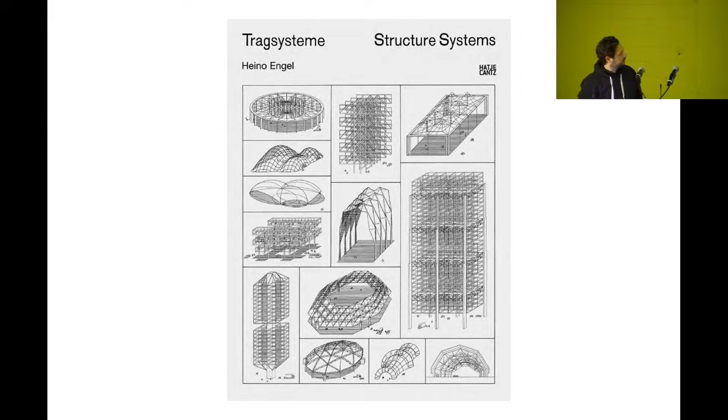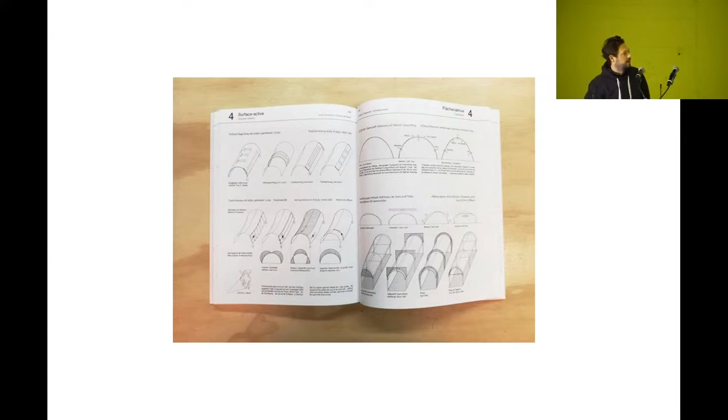So I won't show any of this, but we didn't look at this book that much last year, so this is from last year. And I find it interesting that this is the book that I see on most people's desk now related to thinking about structure. When I was studying, I think there were 2 or 3 other books that were on most people's desks when they thought about structure. And I will say this, as an educator, I think it's as important for you all to know the engineers working in your time as much as the architects working in your time, and the relationship between those two.

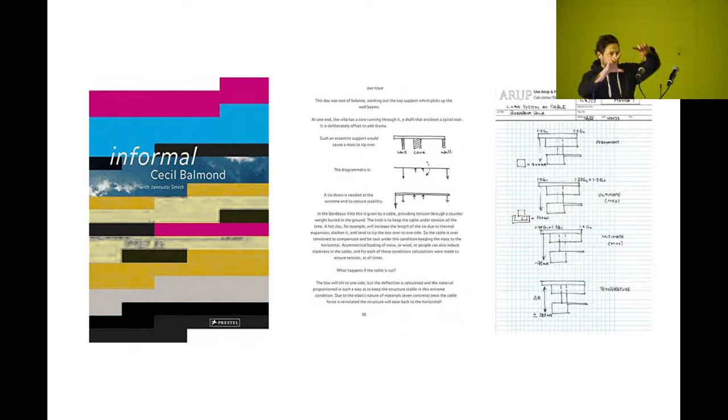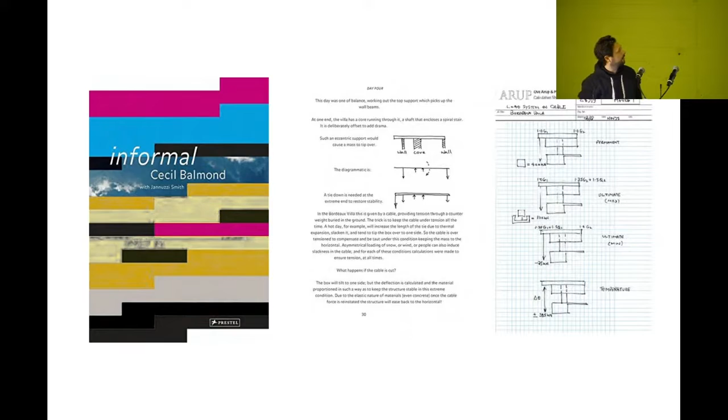And so Cecil Balmond was an engineer who also worked as an architect. If you don't know him, it's a great book. It's a quick, easy read. It's like this big, right? And lots of small passages. He was someone who I think had an idea about elegance, but expanded it to, let's say, increase the options, both aesthetic, formal, etc., within elegant systems.

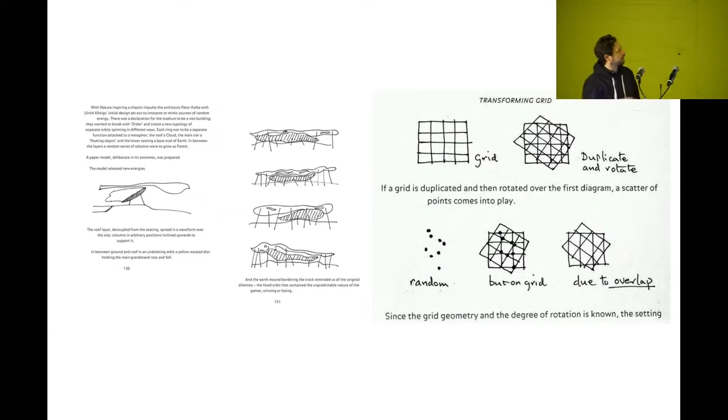So in his work, you find a lot of ideas of redundancy and pattern, and you overlay, for example, these grids on the right, and you'll see the Ito project that worked this out, unless it might be the next slide. Yeah. So he had these ideas of, if you just have an excess of structure, that means I can clip 50%. If I have 200% structure, then I can start to clip randomly. I can take this out, I can take that out, and I'm left with things like this on the right that sort of randomly, I mean, random and not so random, but the redundancy is what allows that to happen with a certain amount of ease and flexibility on the designer side. So much different than the Engel approach, where you would have a regular pattern embedded in the structures.

And I think the other book that was on a lot of desks when I was a student was Guy Nordenson's book with Catherine Seavitt. I studied with Guy Nordenson, and he might object to this, but I think he is someone both interested in elegance and a sort of sloppiness to structure. Of course, he would object to sloppiness, but there's a lot of eccentricity, things that operate outside the system, but not in a planned way like you find with the Cecil Balmond work.

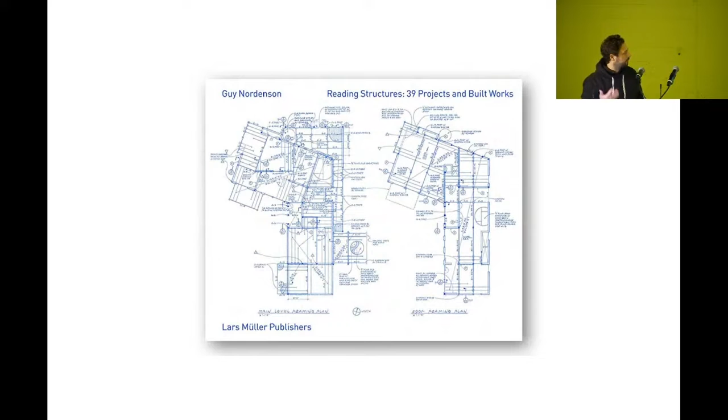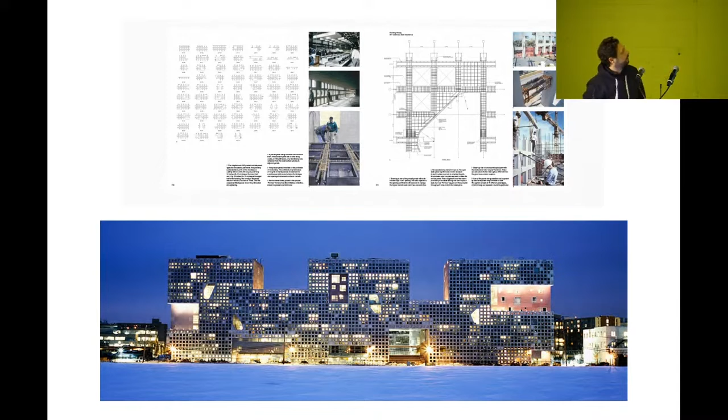So he tends to work with a lot of architects that might be in the fine art, the arts sphere, works very closely with Steven Holl. This was the Simmons Hall at MIT, which was a Guy Nordenson project. So both systemized and highly eccentric, but less redundancy, right? So there's not an overloading of the system. I think that's the rebar pattern. So where things get weak, you double up in a more local area, but he sort of embraces those changes to the system. He also worked on the New Museum, and this is another Steven Holl building he did.

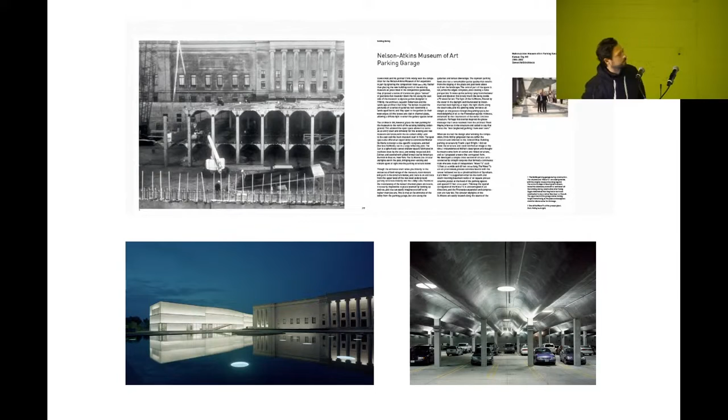I think most interestingly with Walter De Maria, worked on the sort of the parking garage, and I think that'll bridge into this idea of genetic and generic. So the studio we were part of last year was really set up around these, so I hope this isn't too remedial and that it's repeating a studio from the past, but I think it could be interesting to see the lineage of that. We had 6 types, and

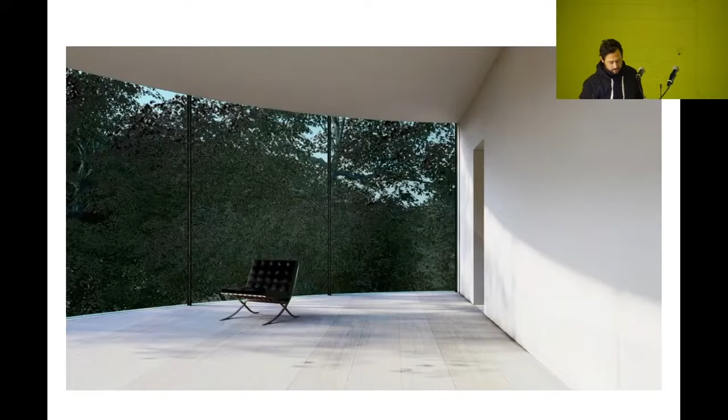How'd that happen? Wait, what happened? I want to go to the top without you seeing everything. Okay. Thank you. How do I go full screen? This one? Is that it? What is it? Control L. I know, I'm not a Mac user.

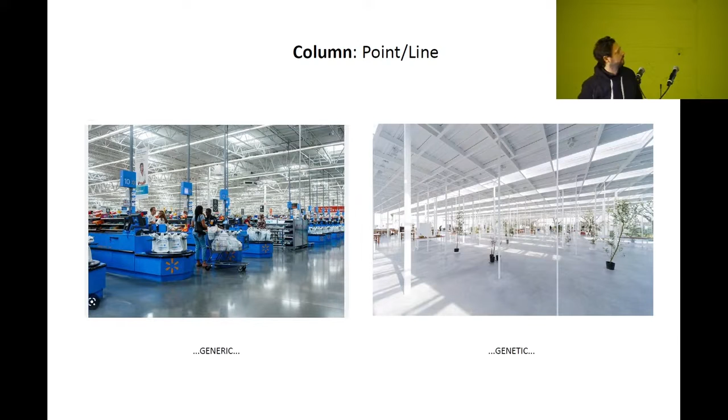There we go. Okay. So I find this kind of interesting, like the most rarefied and the least rarefied buildings using more or less the exact same structure. But I think you can trace this into all types. This is another Steven Holl building, a project for a Cinematheque in Korea. Surface, slab, edge, line, very cleverly using heavy materials in light ways. So when you turn the slab 90 degrees, you get these thin lines, but it's not much different than a generic, I don't know, Amazon warehouse construction.

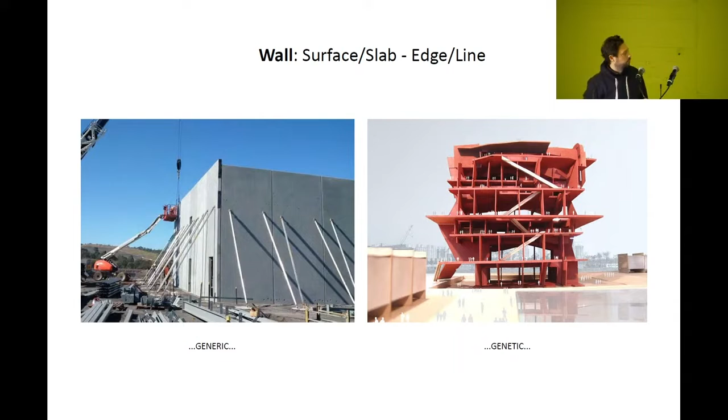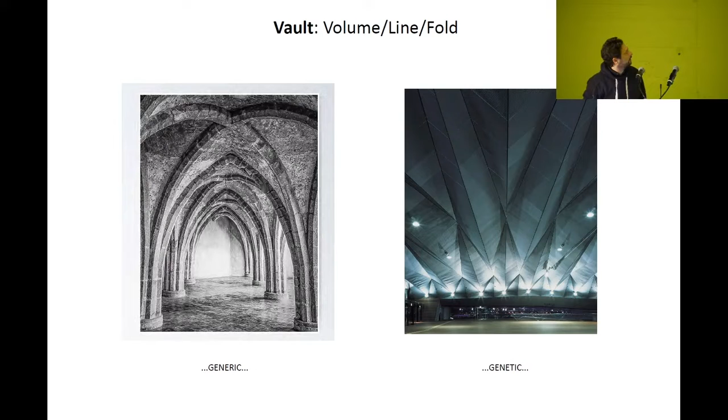So a lot of, I think, great engineers are able to take these really simple systems and push them into new territory. Surface and volume with arches, voids and infills, vaults, lines, folds, volumes. That's Alejandro Zaera-Polo's Yokohama Port Terminal on the right, and then a sort of generic Renaissance arcade. The Louvre pyramid on the right, a sort of adaptation of a generic space frame building. I probably should have looked for an older space frame because that looks like it's of a newer vintage than the pyramid, but I think you get the point.

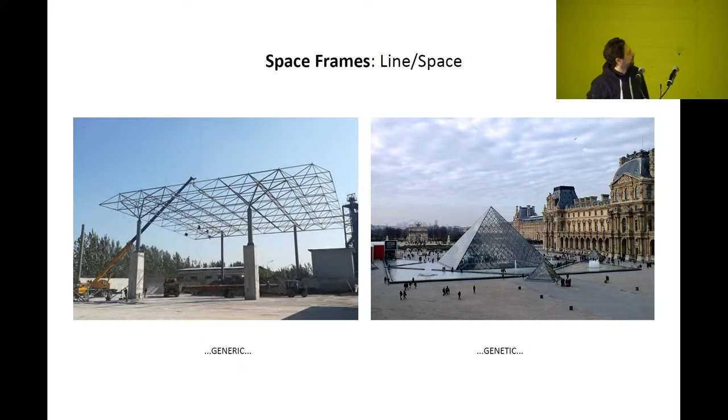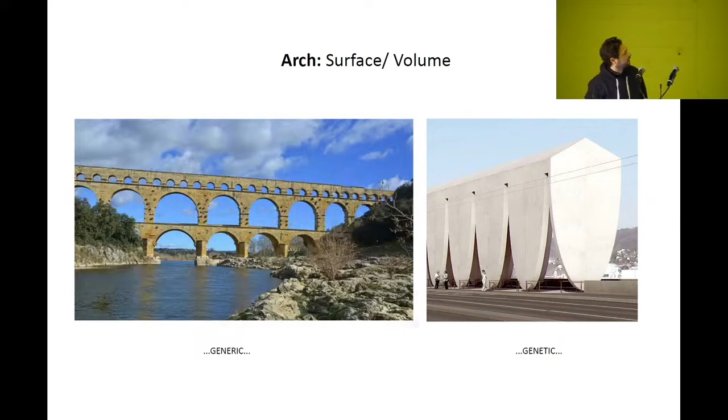And then the last one, which I think is an inversion of all the other types, in that in these, the generic is kind of, I don't know if the word improved is fair, but the generic is explored through the more rarefied architect-authored building. But I think funny enough, in the long span, it actually happened the opposite way. So the cathedral or Nervi, those were the rarefied that have been turned back into the generic by cheaper types of construction. So I think it can go both ways, right? So that was the setup.

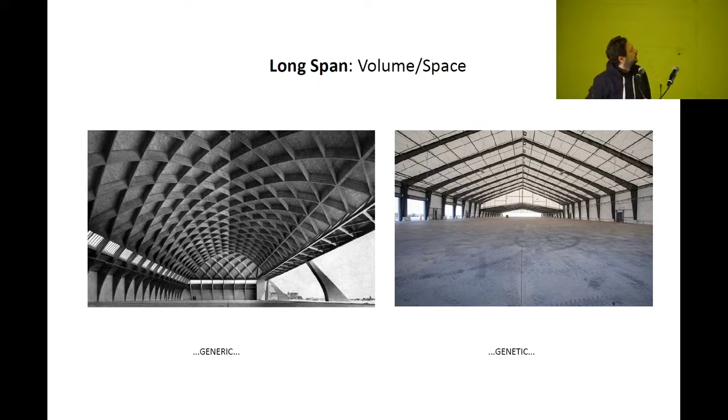So this was the first project I did with my partner Julian Rose, and we were obsessed with structure. I think we still are obsessed with structure, but we were obsessed with basically how do we undo structure, right? And we wanted to think about reinventing an idea of elegance that was not minimal, but on the complete opposite end of the spectrum. So our rough theory was, yes, you could move towards the absolute minimal, most refined element, or on the other hand, you have a really simple idea of structure, which is enough of anything holds something up, right? That you don't even actually have to think about structure. You take a pile of chairs, you take a pile of whatever, enough of anything holds something up.

And so we started these simple experiments. We were also very interested in landscape and some other ideas of structure. I think the other major thesis that we had around the idea of minimal structure was that it did not have to be vertical. Most structure is kind of minimal and vertical. We were obsessed with this idea that you could have a type of structure that expressed itself equally in the vertical and the horizontal dimension.

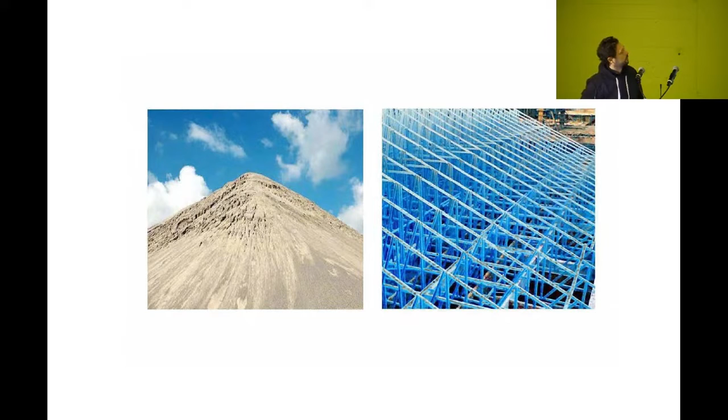I can show a little preview. So that's a prefab aluminum truss roof that you might put under a gable roof to keep it from blowing away. And we wanted to work with these two generics that were kind of local to that area. One was sand piles, and the other were these sort of off-the-shelf kits that were being deployed everywhere. And we sort of just love that a truss and a pile have the exact same property, right? And they have the same section and the sort of same geometry.

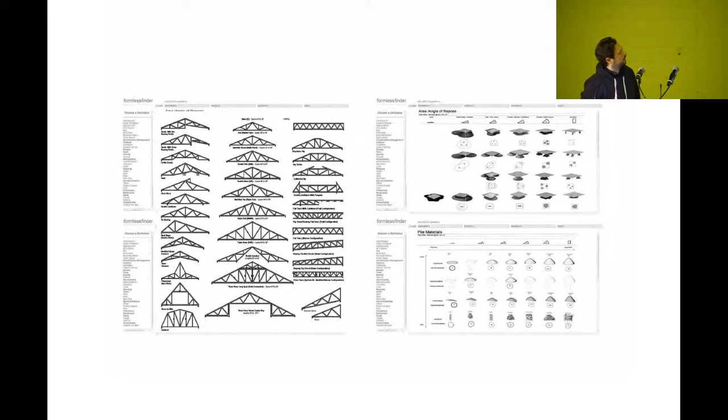So we started playing around with some of these, like the way you have truss diagrams. Could we produce pile diagrams as a real structural device? A mud pile, well, it's actually a puddle. Mud puddle on the left can't hold up a slab, and then if you get too far to the upper right, you get back to a conventional column. So we wanted to work with an architecture that was sort of stuck somewhere in between.

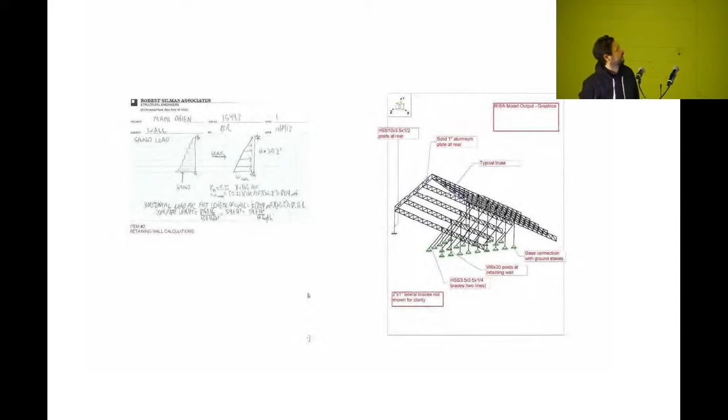And we worked with Robert Silman Associates. The only reason this project got through was because Robert Silman Associates had helped re-engineer the sagging cantilever for Fallingwater. So when the city of Miami kind of questioned our engineering chops, we had very good backup. And I think when you're trying to do new things in structure and engineering, it's like showing up with your lawyer. You bring an engineer, and that really helps.

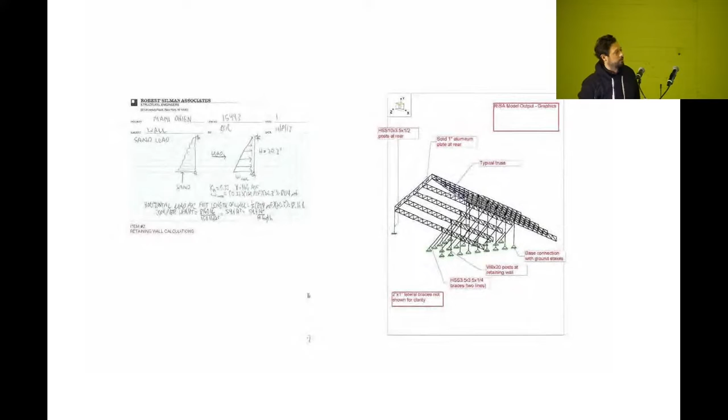So as kind of loose and messy as the things we were playing with were, they were also super engineered, right? So like table after table after table, each connection at the truss. This is more like what the project is. So it doesn't really address structure.

Except for one fact. So the other thing we wanted to do here is, we were going to work with a certain amount of excess, but in Miami, unlike New York, where you have bedrock, things are drilled into the bedrock. In Miami, everything sits on shifting sand. So whether you're building a Walmart parking lot or a 50-story tower, you have to put in a sort of counterweight of concrete to hold up your structure.

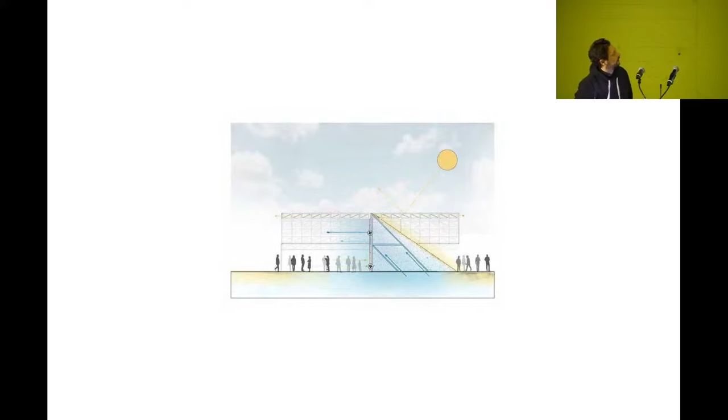And what we thought of was, could you build a building without a foundation? So we wanted to create a sort of pavilion that had no foundation. So nothing goes in the ground. And instead of building a footing, we use a pile of sand to weigh the whole thing down. So embedded in that pile of sand was a really simple set of steel struts, which actually hold the entire cantilever down. It's 40 feet in either direction. And that became the structure. It's a typical detail. And sort of what we ended up with.

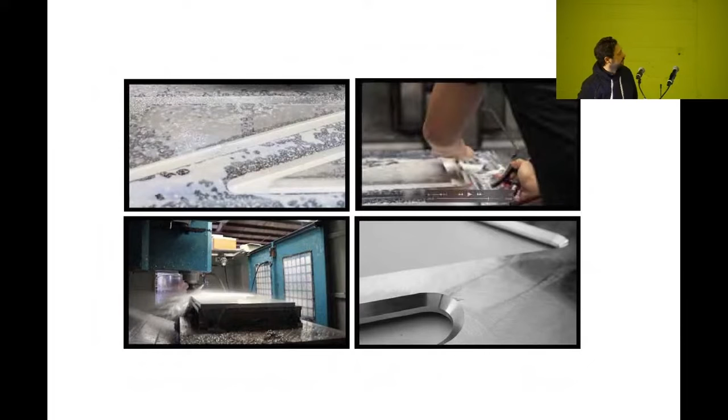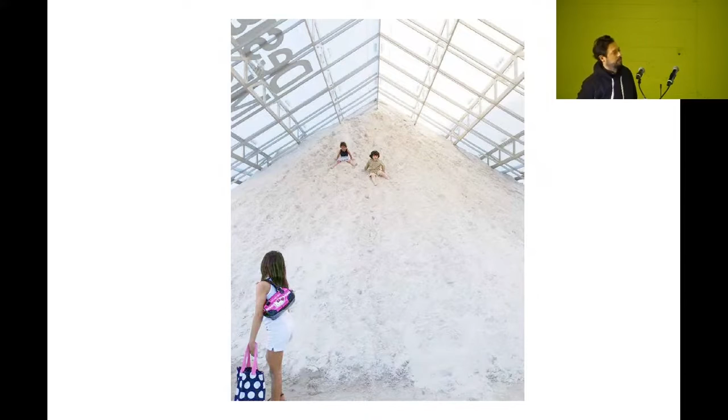So it was a combination of super high precision and complete informality of the sand pile. Just some shots. And I think what was really exciting for us was, if you reinvent structure, you also reinvent use of buildings. And so we had people, families, building sand castles, acting as if it were a sand dune, et cetera. And it kind of opened up the types of use for a building also, which we were kind of excited about. There's the night shot.

And so after that, not many people asked us to build other buildings out of sand. And so in terms of career trajectory, I knew to build bigger things, I needed to get at it a different way. And so with James Carpenter, we won the competition to redesign the Gateway Arch Museum, which is a building under the famous St.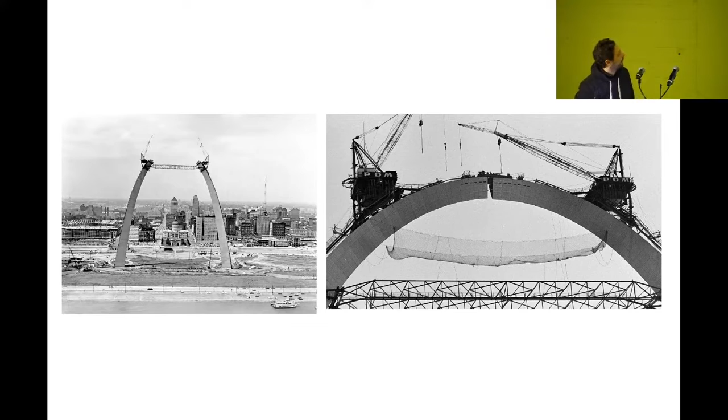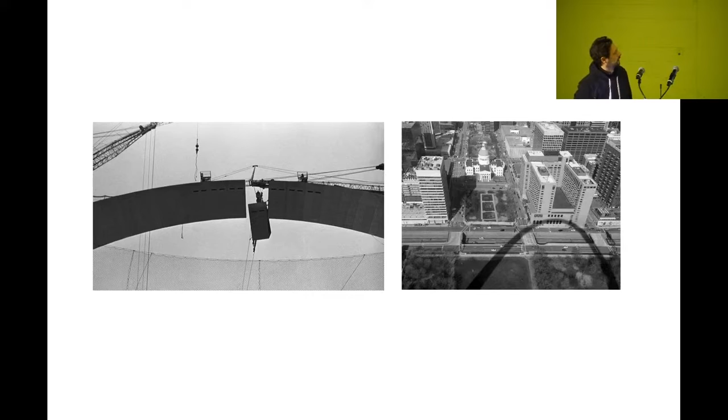Louis Arch. When Saarinen designed it, there was a park that was supposed to connect the State House, which you see between the legs of the arch, and the arch grounds. That was never achieved. There's actually, if you don't know it, a great movie, maybe '65 or '66, about the building of the arch. I think maybe it won or was nominated for an Academy Award, but it is a really entertaining documentary about structure.

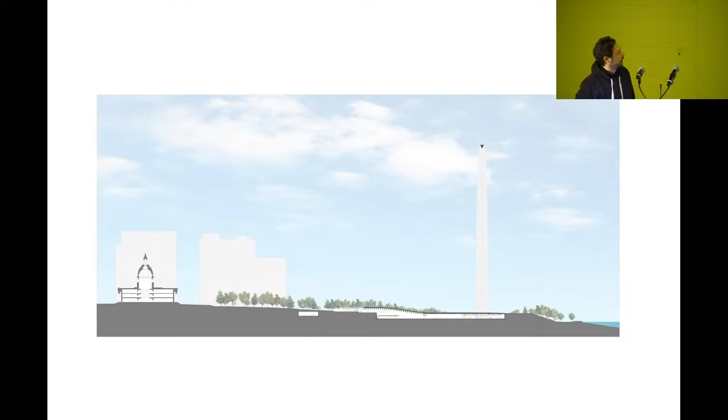And so this was our proposal, was to basically do what Saarinen wanted to do, which was connect the city hall and the arch, and then build a building that would also allow you to connect those spaces, but to do it in the most invisible way possible. So we put 45,000 square feet underground on the historic lawn, and a kind of land bridge over the highway that connects you back to the city hall.

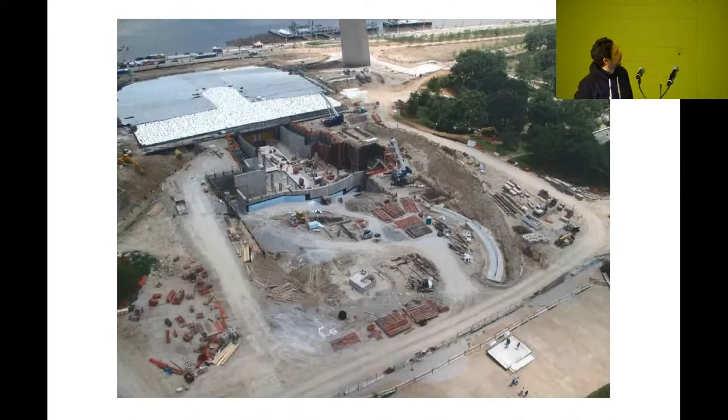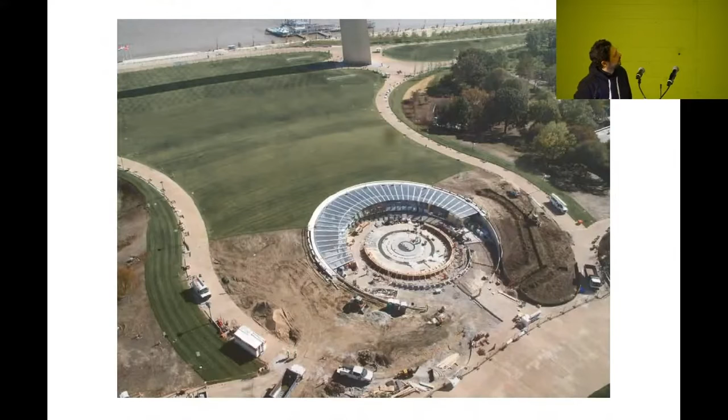And so this is just a construction sequence of building this, all concrete underground. And then that's the entryway shaping up. That was mostly my responsibility. And so the entryway is all steel and glass. It's coming together, view from the top. And views back to the courthouse. The section was kind of interesting because you could get light maybe 400 feet back underground, and it was pretty excellent to be way back in that space and get sunlight back there.

So maybe a little tiny sub-history of this office's work. James Carpenter is a really interesting architect, but also artist who started working in glass a long time ago, worked at Dale Chihuly's studio, and had less interest in art glass, but started to develop different types of technical glass and worked as an artist in residence for Corning and helped develop some of the earliest glass technologies that are now in your phone or found in Gorilla Glass. It sort of sat around in sheet rolls for a long time before they figured out what to do with it. But the office has a history of really working at the micron level with details and glass technology and construction.

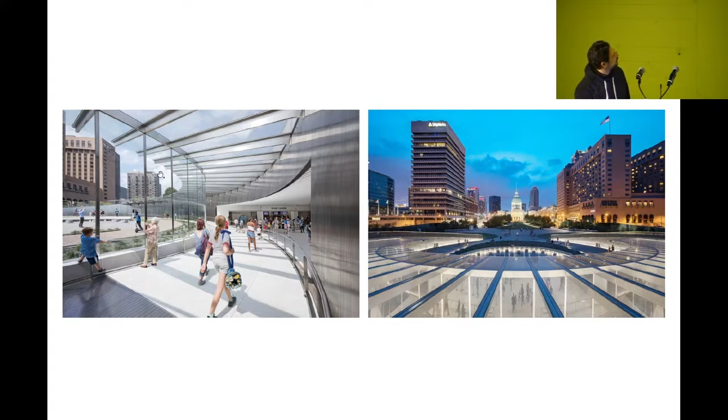Something quite interesting about this image on the left, you see my mouse? Yeah. So this, which appears like really thin structure, maybe propping this up or holding this up, is actually done in the opposite way. These are attached back at a concrete wall here, and these are actually holding this down, right? So we work in some pretty surprising ways to achieve a sort of lightness or thinness in design and construction. I sort of love that moment where you think this is doing one thing, but it's actually doing the opposite. So this is keeping this from actually blowing away and not the other way around. Just some shots from above, and then that's what we're able to achieve with connecting back to the City Hall.

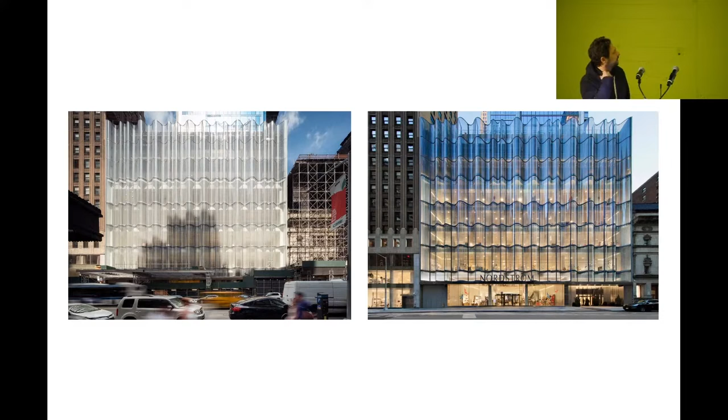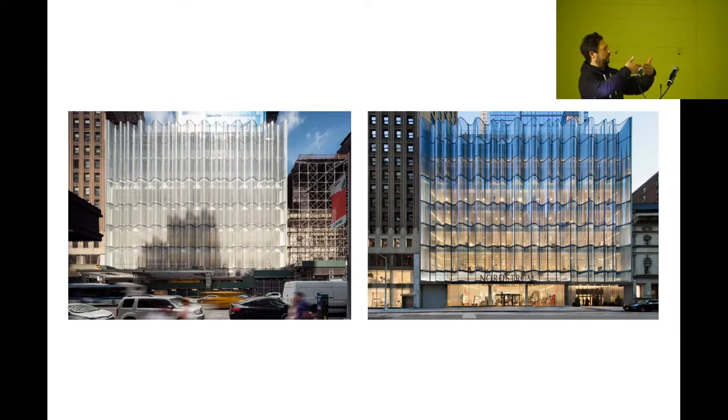Another project that I worked on there was the flagship store for Nordstrom on 57th Street. 57th Street runs all the way across Manhattan. It's a major thoroughfare, and it is dead flat. So every building is maybe, in plan, 1 foot out of plane from the other building, for the whole stretch of the island east to west. And so we had this idea to produce a different view of 57th Street through a bay window.

Other architects had done similar things in terms of forming glass, but we were able to use the glass as a sort of partial column, which allowed you to actually walk out into these spaces. So instead of approaching a flat wall on 57th Street, you can, these are just mock-ups of the process, but now you can step into the avenue and have all of these different urban views through this structure. This is also on what was, for maybe 12 minutes, the tallest tower in New York. I'm sure there's many taller now.

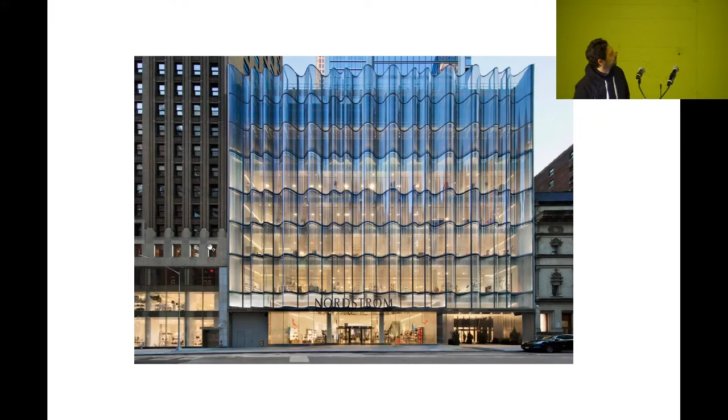Another steel and glass project for the Hudson Yards in New York. I don't know if anyone knows this property, but Manhattan had run out of large sites. This was one of the last sites that developers had their eyes on. It was a large train yard. At one point, there was a proposal to build the Jets Stadium over this and many other things. And this is all sort of pre-High Line. This project now anchors the north end of the High Line.

But it was purchased by a large real estate group that built an entire concrete deck over the train yard. And it's now become a kind of destination neighborhood.

Love it or hate it. You can ask me off camera.

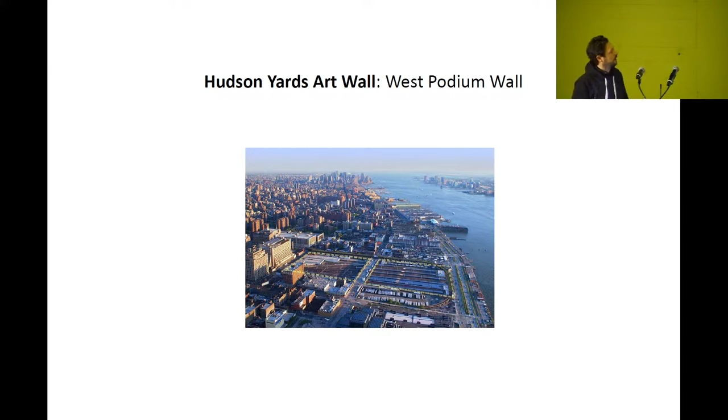But it was certainly a contentious real estate project and became a sort of tower museum for architects. There's a Diller Scofidio tower up and down here. There's Zaha apartments, et cetera, et cetera. This is the yard getting covered. So over here, you're seeing the concrete deck going up on half the yard, and then it eventually covered the

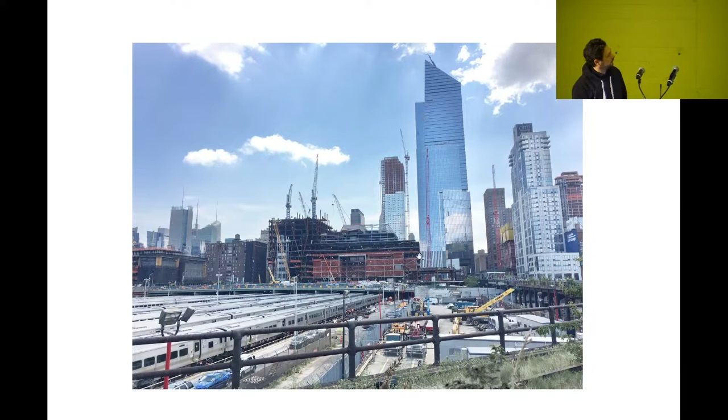full yard. We were contacted because the architect of all of this had, for probably 2 years, a rendering that showed a glass wall the size of the New York City Public Library without any joints in it. And when they got around to designing it, it didn't quite look like that. And they thought that we might be able to help figure that out. So we were called in to design just this retail wall. I think it's roughly the size of 2 football fields.

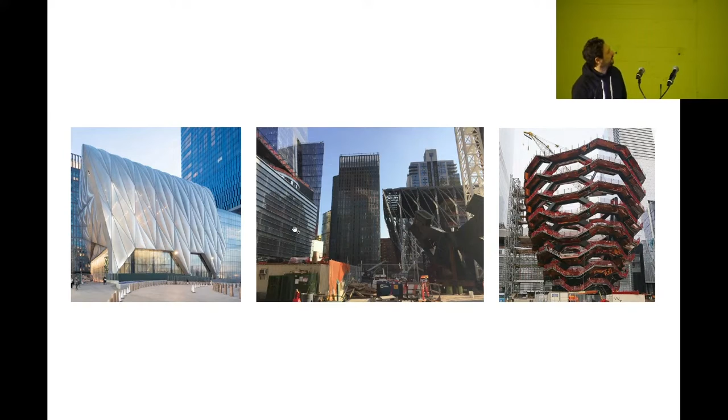That wall, which you see here, and I'll go into in some detail in a second, was between some very loud neighbors, Thomas Heatherwick's Vessel and the Diller Scofidio Culture Shed. And so what we wanted to do was not add to that, but to quietly sit in the background. We had some other ideas in mind. I would say that maybe from the beginning, people had doubts about this thing over here. And as a starting point, we said, the last thing we wanted was 2 of them, right?

Glass is highly reflective. Is there a way to make it a one-off? And Thomas Heatherwick really liked that. There's no duplicate of his project. And we really like that too. So we had this idea to produce a curved cable net wall that was angled so you never got a reflection of the Vessel in it. So it could be its own autonomous glass structure.

This is quite interesting. No one had ever done a curved glass panel cable net wall before. Basically, a cable net wall is all supported by cables behind and struts holding out. So the only joints are silicone. So we have a football-field-size glass wall that has absolutely no frames, and the only joints are silicone. The other tricky thing is, you see it a lot in deli cases, this shape, but this is what's known in the glass world as the hockey stick. And it's incredibly hard to produce, and most people won't do it.

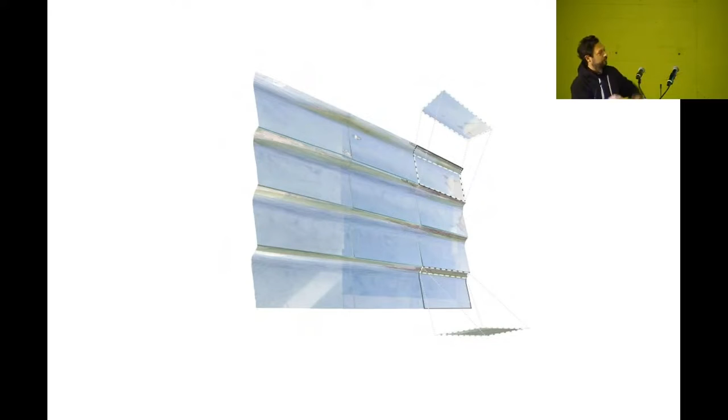We partnered with an Italian company that works on one-off automotive pieces of glass, and they might make the engine shield for the back of a Ferrari, but they hate working with architects. They're always cutting budget. What this company likes to do is make an impossible piece of glass that you only make 10 of, right? And so they don't want to do a tower. It'll get value engineered, and they won't really get to do what they're good at. And the quantity isn't quite right.

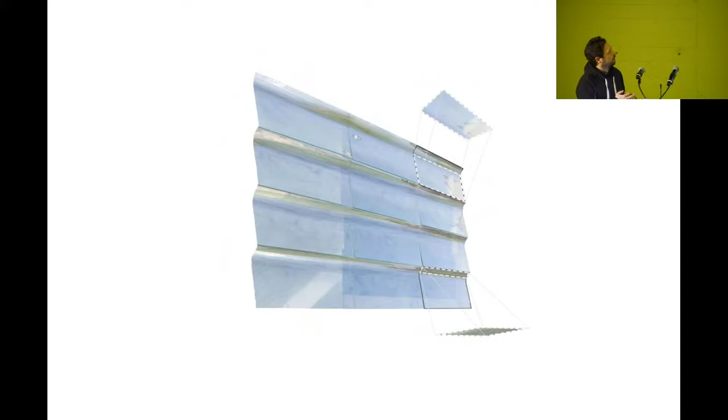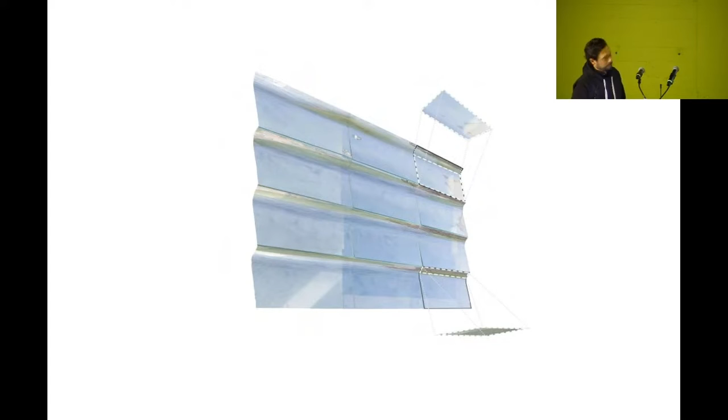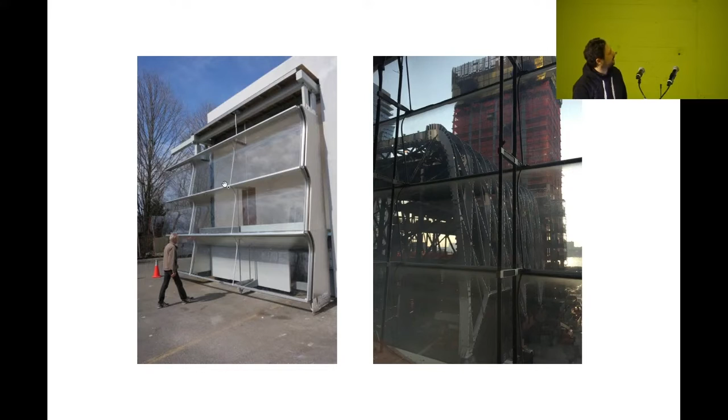But they were very intrigued by this, because it wasn't a whole tower, a lot of glass, but not a whole tower, and a shape that was nearly impossible to make in laminated glass. And so we worked with them to figure that out. That's the system in the end. This is the vertical joint, but there was a horizontal one, which wasn't really a frame, but it was there to conceal a kind of ugly edge.

This is Hudson Yards under construction, our wall under construction. This is the cable net from the inside. You can see a cable net wall usually has 2 directions of cables: horizontal, which are much heavier, and vertical cables, which are thinner. But you're able to do these enormous columnless spaces with just suspended sheets of glass. And so Schlaich Bergermann, who we worked with, had pioneered this technology. And we were often working with them on how to reinvent things like the cable net wall all the time.

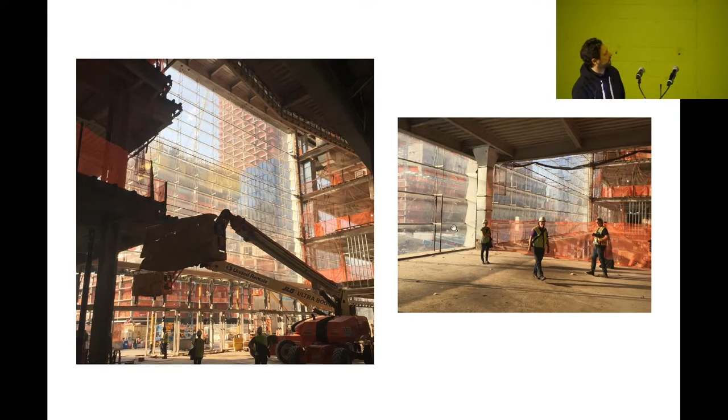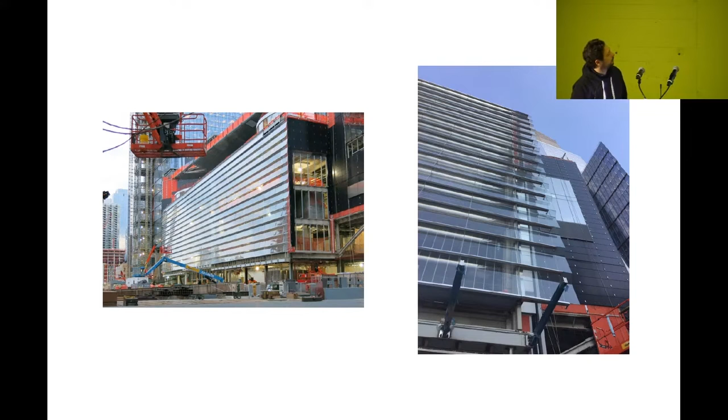This gives you a sense of scale. One of these things is about the height of a human. Maybe it's like 4'6", 4'9", not quite 5 feet. And that was our wall. So yeah, we were able to get a completely seamless glass wall out of that. So, the details at the edge.

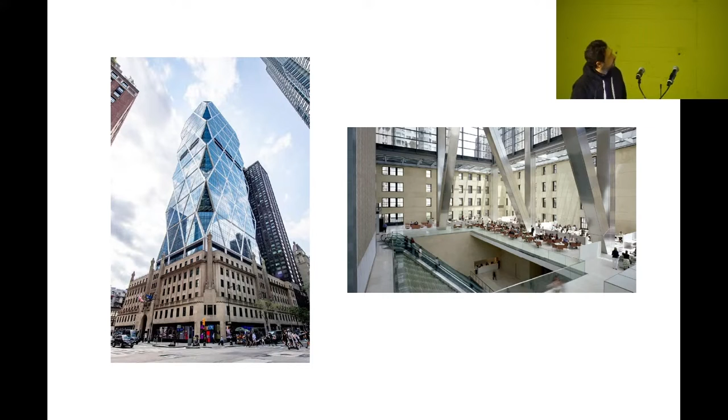I was going to say smaller project, but this is the Hearst Tower in Manhattan. And I'm just going to show this quickly. I did not work on this project, but we did work with cast glass for many years. Jamie had worked with it probably for 10 years or so.

So this is in the base of the Norman Foster Tower, and this was not structural. It's kind of, I guess, architectural, but it was more of like an interiors project. And what we were trying to do was bounce light down. But we played a lot with structural glass.

And a project I ran at the office was for the Henry Ford Museum in Michigan. And Henry Ford was a strange, autocratic guy. And one of the things he did was collect technologies, like if he saw a gas station that had a new type of technology in it, he would buy the gas station and have it shipped to Dearborn, Michigan. He did this at a kind of maniacal rate and with kind of maniacal precision.

So he collected trains, planes, and automobiles, buildings. He was so, I guess, fastidious about it when he bought a Thomas Edison building. Edison didn't want to sell it to him, so he told Edison he would also buy all the dirt under the building and move it to Dearborn, dig it out, put in the building, and put in the dirt from New Jersey under it. So he would do these kind of wild things in his pursuit of collecting and understanding technologies. One of the things he collected was glass.

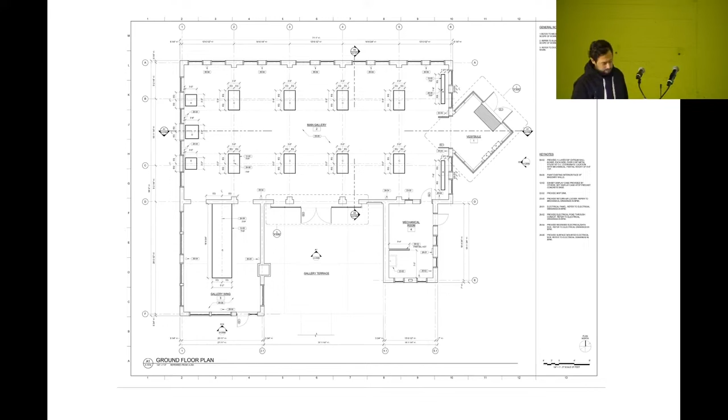So they approached us about producing a really small building. It was an old machine shop. This is a brick building, old machine shop that was moved from, I actually don't remember if it was Maine or New Hampshire, to the campus. And this would house some of Henry Ford's glass collection. It was art glass, technical glass, colored glass, anything that was a sort of new technology in glass, there would be pieces of that here. So this was us attaching some little modern pieces to the old building.

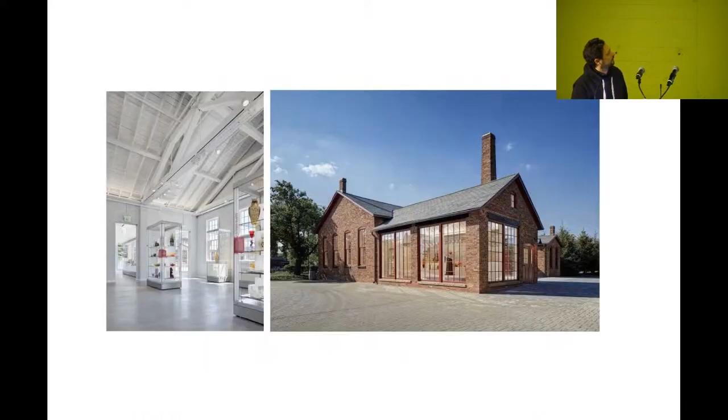The last project I'll show, which is done with my new office, not with this group. I'm working with the company that did the historic preservation of this. They work a lot in Virginia and DC, but also Detroit, and they did the preservation piece, and we did the new piece. And so this is the generic building, and then on the front it had, and this is what links back to the Hearst Tower.

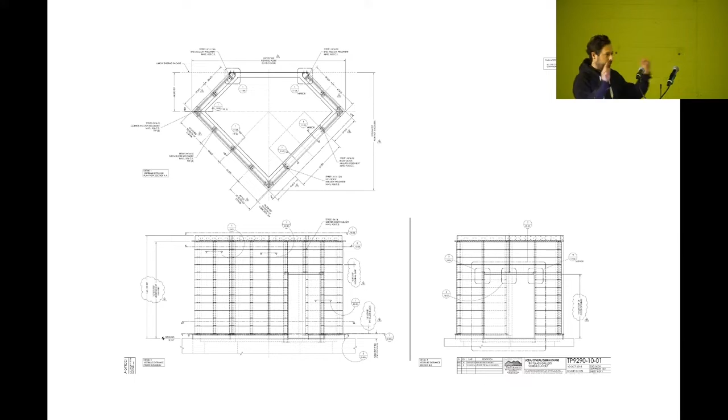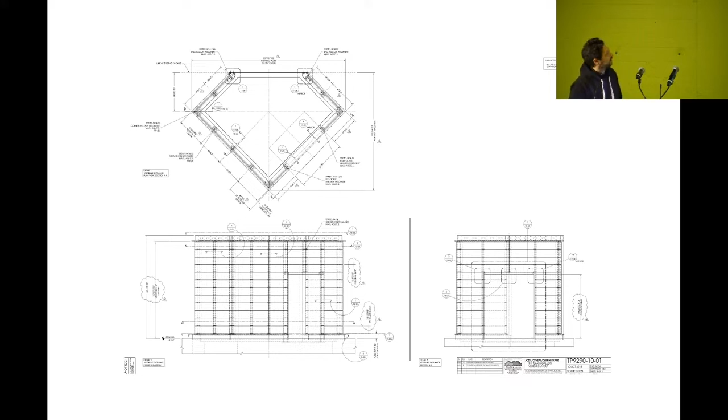And so this is the first time we were able to get this cast glass to work as structure. There's some thin steel in here. These are about 150, 200 pounds each. So those would hardly support this, all swaying. And so what keeps it from racking is actually the glass. So the glass allows us to minimize the amount of steel and actually becomes the envelope and the structure simultaneously.

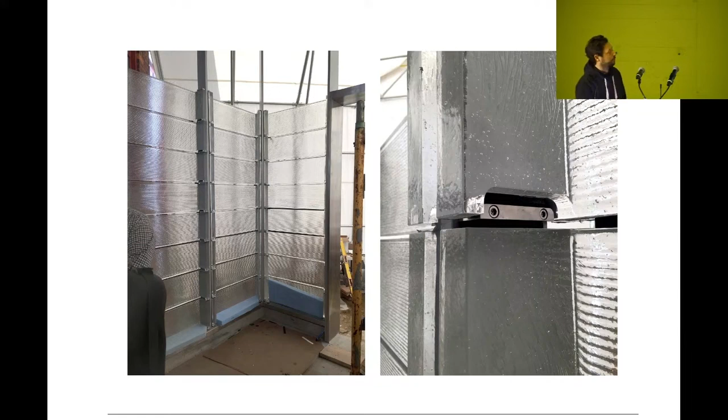And then we had to figure out some really fun and tricky details. It's at a museum, so if a kid throws a rock, how do you replace this? I've seen attempts at systems like this where that was not solved for, not at this scale, but with glass block walls. And anyway, we wanted to find a way that this could really fully operate as a responsible piece of architecture, and that you could replace any piece of it. So these were some of the details that went into it.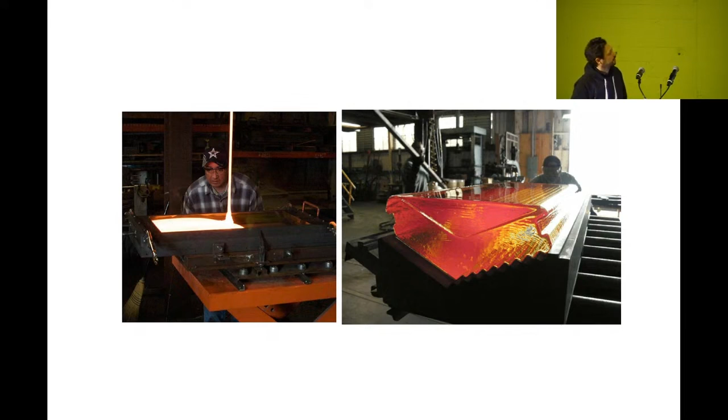This is the casting process. It's all done in graphite molds. It's pretty cool when it comes out. And it's highly specialized. It's really tough to make these pieces. And when they cool, they sort of bend. So you really have to watch after the cooling process when it's manufactured. And some more details, and yeah, so that was the vestibule at Mates.